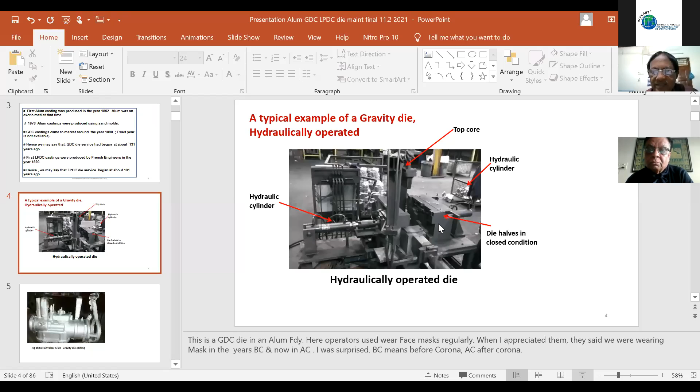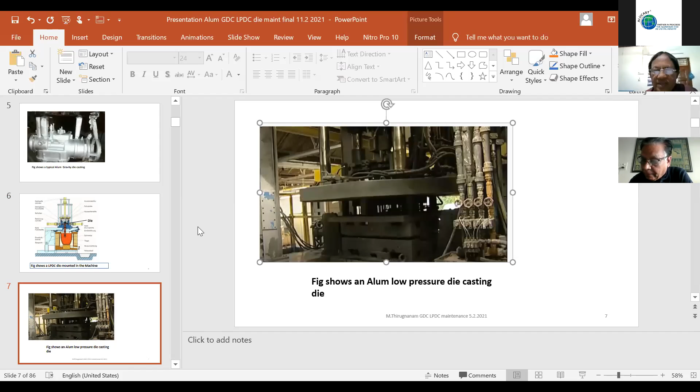Why is there a need for maintenance in GDC and LPDC? Dies are affected by thermal stresses due to heat of the molten metal.

Thermal shock occurs in every pouring because the temperature difference between the metal and the die is about 470 degrees. Metal is at 720 degrees and the die is at 250. The difference in temperature is 470 degrees.

It's like always pouring very hot water on your head and getting a shiver. Like that, for every shot, the die undergoes a thermal shock. Molten aluminum has a natural affinity for iron, and it attacks it chemically also.

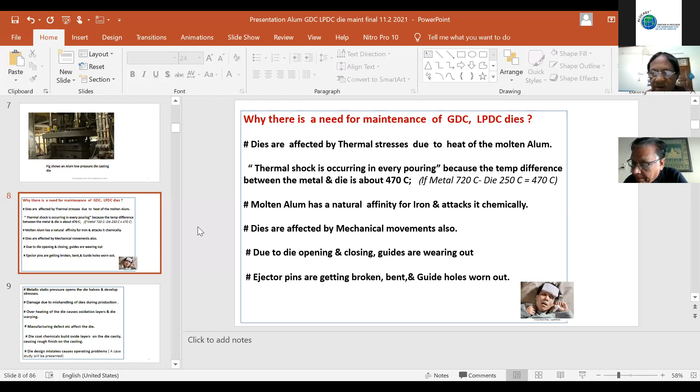The dies are affected by mechanical movements also, due to ejector pins getting broken, bent, guide holes worn out, etc. So the die is affected by so many factors.

Metallostatic pressure opens the die halves and develops stresses. However much you close the die, it opens at the top.

Damage due to mishandling of dies during production also happens. Sometimes the operator uses force for closing.

Overheating of the die causes oxidation layers and die warping. Sometimes when the dies are heated to start the pouring, people put the burner on and go off. The dies will get red hot. Effects like that also affect the die.

Die coat chemicals build oxide layers on the die cavity, causing a rough finish on the casting. Die design mistakes also cause a lot of operating problems.

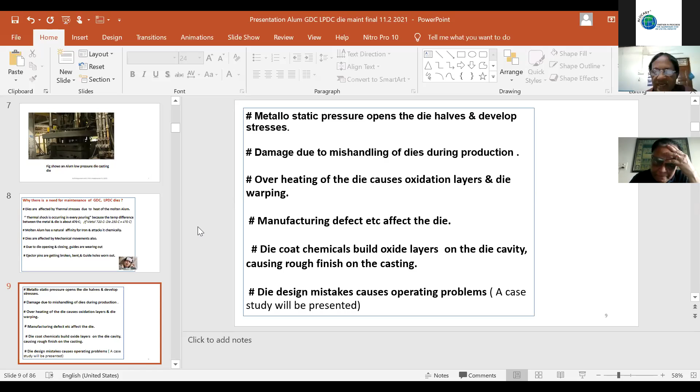Sharp edges left out during die manufacture create hot spots and crack development. All the above create the necessity for die maintenance.

In a nutshell, dies are self-destructing equipment by the very nature of the process itself. Of course, this is true for all foundry equipment like furnaces, building equipment, even ladles - they perish. Sometimes they get worn and leak also.

So there is a saying that a foundry's profit or loss is decided in the tool room indirectly rather than in any other area. Indirectly, die maintenance personnel run the foundry show.

At this point, tool maintenance personnel come into the picture in all stages of production, not only in making castings, but also in fettling, trimming, everywhere.

They design the systems and procedures for maintaining the health of the dies until the designed service life is obtained. They are the right and fittest persons to scrap the die also.

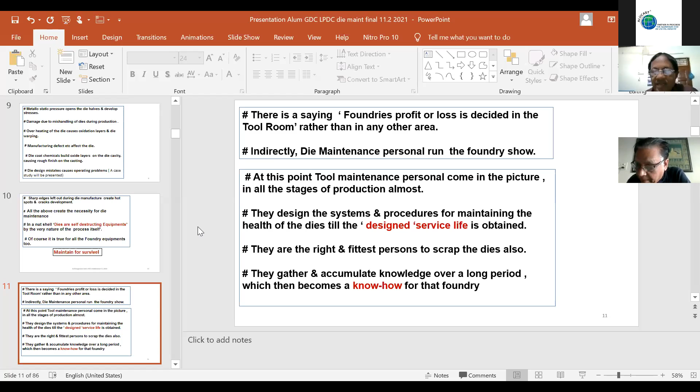They gather and accumulate knowledge over a long period, which then becomes know-how for that foundry. They give feedback for improving the die design and die manufacture.

I shall present a few case studies on this. First, the statistical support and guide for die maintenance is the die history card, which is a very vital record.

As soon as the die is returned, the first activity is to enter the total number of shots taken in the die run, in the die history card. The last shot taken must come along with the die.

The shop supervisor should send his observations on the die, the problems encountered, and the service requirements. Tool service personnel then start their planning.

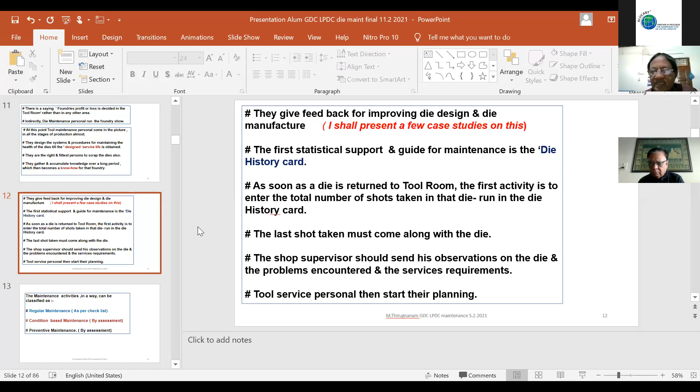The maintenance activities can be classified as regular maintenance, that is the routine work common to almost all the dies. The next is condition-based maintenance, based on how the die looks and how it is affected. And preventive maintenance, to prevent long-term failures during die running.

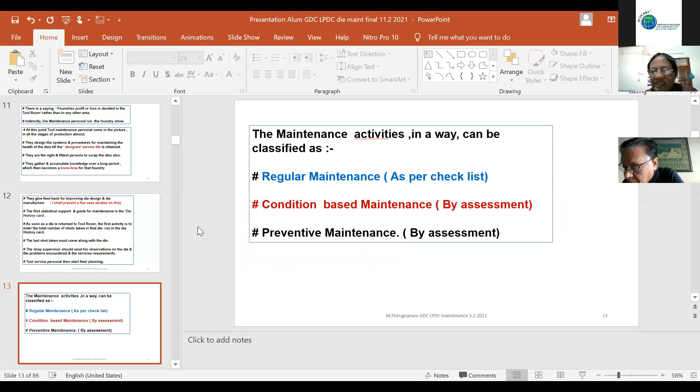First, regular maintenance - it is like taking a bath regularly every day, a routine activity. A checklist is designed by the tool serviceman that will be followed during service. Most activities are common to all the dies except a few differences.

Although GDC is a positive gravity process and LPDC is a negative gravity process, because metal flows against gravity, the maintenance is almost similar, except for a few points of difference.

As soon as plant production is completed - say 5,000, 3,000, or 6,000 numbers - the die is moved. At that time, a die service report is to be prepared by the supervisor and sent along with the die, along with the last full shot of the casting.

Many people forget to write the date on the casting. I would insist that when they send the casting, they must take a marker and sincerely write the name and also the date of the casting.

The following information is to be filled in by the shop supervisor: number of shots taken, casting.

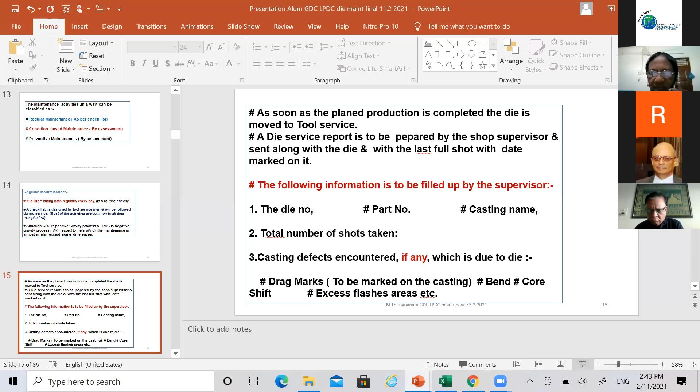The following information is to be filled by the supervisor: the die number, part number, casting name, total number of shots taken, and the casting defects encountered, if any, due to the die. For example, many castings will develop drag marks, depressions, core shift, etc. Excess flash areas are to be marked on the castings.

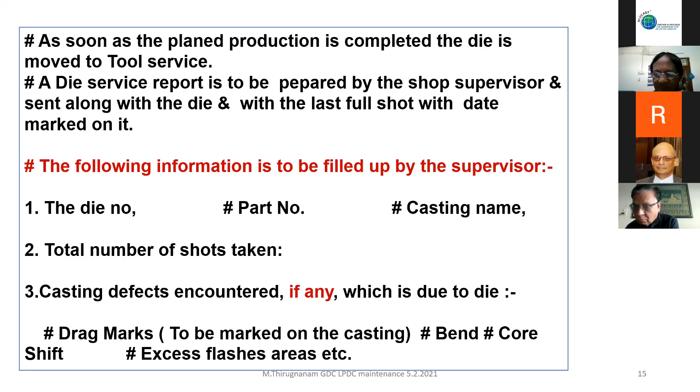Also, various observations should be noted: whether the die closing is correct, the die opening is correct, the bottom board dropping is correct. So many movements are there in a die depending upon the construction. This is very important.

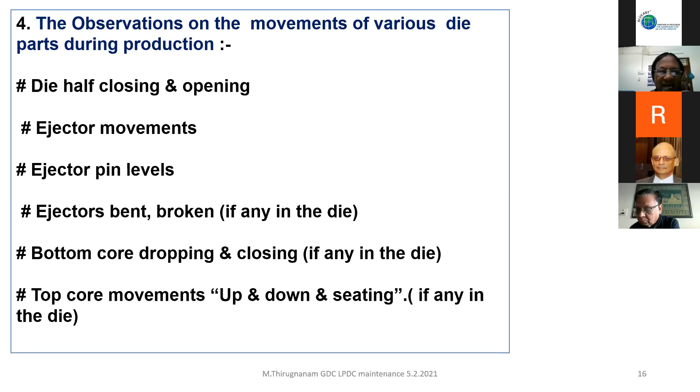Or any oil leak in the hydraulic cylinders, air leak in the air cylinders, metal leak at the parting line. This is one of the very vital pieces of information required because metal leak can cause a lot of accidents. Excess flashes in the die parting line can cause more time in fettling. Also, some dimensional defects can happen.

A tentative time and date for return of the die to the foundry is very important. In India, this is a starting point for many arguments on the shop floor. When a very short time is given for die service, many times the tool room is unable to attend to all the corrections.

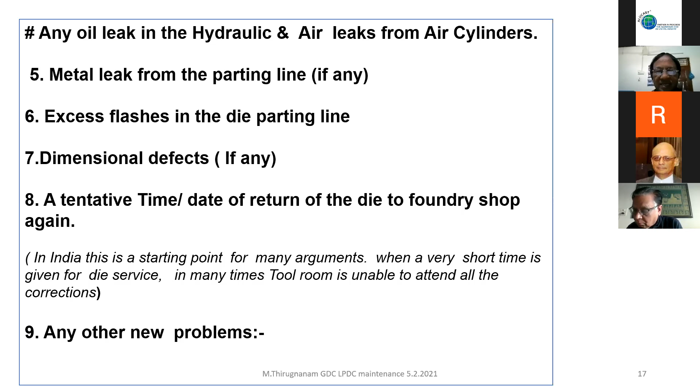Also note any other problems the supervisor observes. As soon as the die enters the tool room, the die has to be cleaned first, then dismantled. Cleaning means all the flashes sticking on the die here and there are to be removed. Then dismantle the die and remove the die coat by applying mild sandblasting, and put the entire die in open condition. If it is a big die, keep it on the floor.

If it is a small die, put it on a die table. Very closely inspect the die cavity area and look for scoring marks, depressions, aluminum welded areas. This is very, very important. Check all the slides and look for metal entry in the slide gauge. Also, you should check the marking screw.

It's very important for traceability. If you are going to service the die in December, anticipate and replace that chip for the next year, and also punch the month code for the current running dies. Check the number of shots taken so far. If it is 10,000 numbers, don't hesitate, don't ask anybody - weld all the die parting lines and clean it.

It will improve the fettling. The flashes will be much less. You don't have to file too much and then run into problems of rough finish and all that. Replace all the small core pins irrespective of their condition.

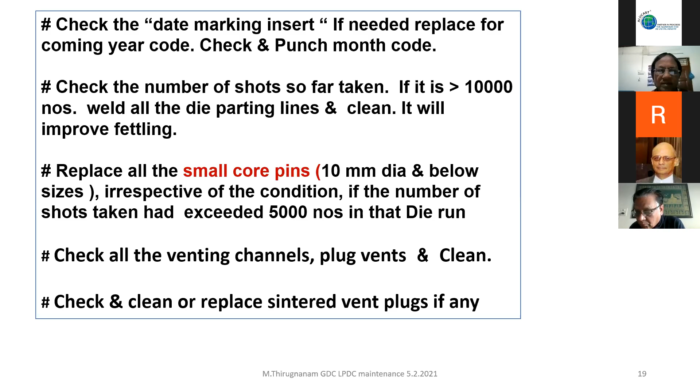Apply blue on the die parting lines and check the blue marking. If needed, match them again. People will ask, why do you want to match a die which is already working well? But it is essential. I am going to present an excellent real life case study - some problem occurred in one foundry. It is going to be an eye-opener.

Check the fin plates, if any - for example, if you are making dies for cylinder heads with a lot of fins. Correct drag marks and depressions, if any, by welding and machining. Check all the ejector pin levels. There is also an interesting case study on this.

A scrap deal of about 5,000 numbers occurred in a die once because the ejector pin level was off by 0.4 to 0.6, causing a lot of unwashed castings. The customer almost shed tears - how can you afford to scrap 5,000 numbers?

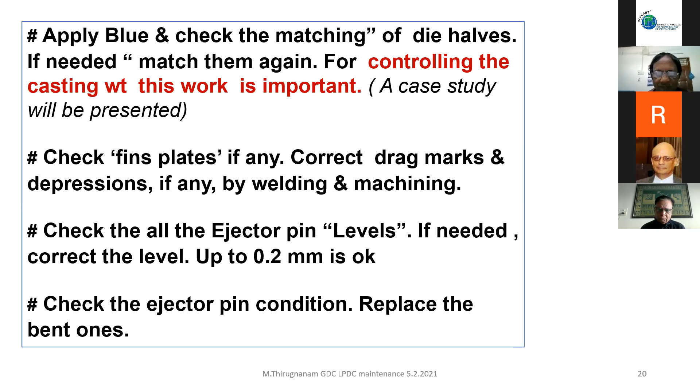Check the condition of the ejector guide bushes and if needed plan for replacements. That will come in the part of the preventive maintenance activity. Probably once in about 50,000 shots, you will have to replace the entire ejector system.

In my experience, I was a tool service man also. Check the condition of the threads and the eye hooks for the die lifting. Sometimes when you lift it for oil leak, change the seals if necessary. But once in about 15,000 castings, I used to change the hydraulic seals without any questions.

Instead of getting it leaking during production, check all the air cylinders. Normally the directional valves only give a lot of problems, be highly noisy also. So check and then replace it, or you can change the O-rings also.

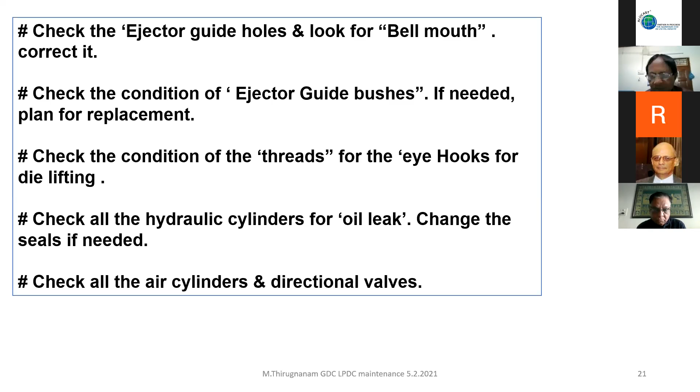Up to about 25,000 to 30,000 shots, it is sufficient to do the regular maintenance alone. After 30,000 shots only, you get into problems.

In the low pressure die casting dies, check the die base warping always on the furnace. It is on the hot bed, so it is likely to warp. Even a very mild warp will leave a gap between the furnace and the die. The metal will not get injected at all with pressure. After all, you are applying a pressure of maximum 0.4 or 0.3 kg per cm square on the furnace. If there is a loss of pressure, metal won't rise. So you must be very careful in that one.

It is likely to warp. But every 30,000 casts, you must take the one and see. You can give a very fine grinding also, say 0.1, 0.2, and see that there's no gap.

For low pressure casting dies, it is better to clean the dies by glass bead sandblasting. Although it is costly, it will not remove material from the die, because if you do regular sandblasting, it will have some problems. In Japan and other places, I have seen every low pressure die is only glass bead sandblasted, very very clean also.

For the normal gravity die, it is sufficient. Once in a way, you can do a mild sandblasting also, or shot peening also, because sometimes it will take on a waxy layer. But it is always better to do it every 1 to 2 weeks, otherwise there will be a lot of die coat build-up and the riser becomes smaller, then there is a lot of problem.

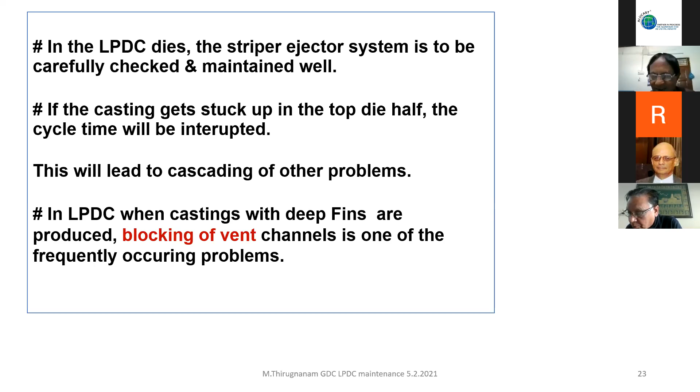Supposing they are using a lot of RC cores, the resin gas and sand cores will deposit burnt resin gases and resin on the vent channels. If this gets blocked, hardly 0.3, 0.4, and if it reduces to 0.1, 0.2, there will be a lot of cold shuts and problems.

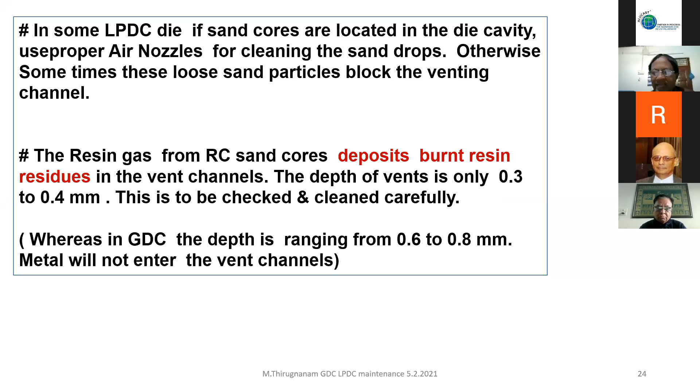So cleaning in the low pressure die casting dies is very important, whereas GDC is not that critical. There 0.6, 0.8 mm vent depth is fine, you can still get away with 0.5, nothing happens.

Sometimes you produce a lot of castings, the fins in the low pressure die, and the gap is very, very important. You can't afford to have many gaps there. If there is a very fine flash entering between the gap of the two fins, it will block the venting, and a lot of problems arise.

Replacement may have to be planned after checking the condition. This comes under CBM maintenance, condition-based maintenance. It is always good to have a setup in place after 50,000 castings; you can always make a new one and put it there. The tool maintenance team should take the decision for replacements.

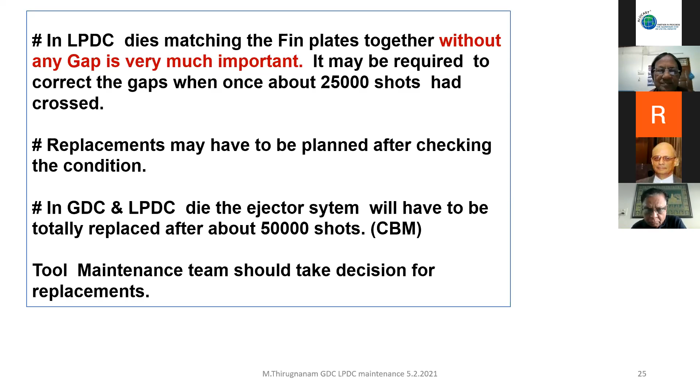Now let us move on to shell core and die cavity. Sometimes you will be locating a lot of shell cores on the die cavity, and the important thing is the shell core can grow. If the shell core die halves are not closing well, all the core print diameters will stay expanded by 0.2, 0.3.

What will happen is it will not sit well on the top core, and when the top die half comes and sits on it, the core can break also. So you must see that the core print area is kept very clean and the dimensions are maintained.

The core breakage cannot be seen during production. It will be known only as a surprise after decoring it. Simultaneously check the core box condition also for that die. This is very, very important.

Sand being an abrasive material, it can wear off very quickly. So reconditioning may be required after about 25 to 30,000 cores.

Especially, there will be fine flashes at the parting line. People used to file that flashes at the parting line. They will become a rough finish in the casting, and the customer will not accept any rough finish on the involute areas of the cover compressor castings. This happened. So you should not file the circumference of any core. In fact, you should not do any rework on the sand core. Otherwise, you will be leaving a lot of problem that comes from the core box. It cannot compromise on it.

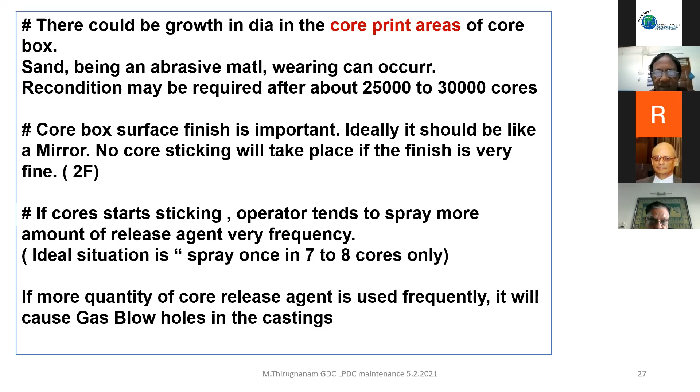When you replace the heaters, people don't have stock. So what will happen is they put some heaters with high power or low power, then it will give problem of underbaking or overbaking, of course. It will give a lot of problems.

So it must be, some people don't have a stock of the correct length, so they will put some excess length, then it will lead to a lot of issues. I have seen accidents happen. Then another important point is the core box closing.

No sand should leak. 1 gram of sand will cost about 20 paise. So if I'm going to lose some kgs of sand, imagine the loss in a year. Also, it can cause the housekeeping to get worse. The supervisor will come and fire on you. So you must see that no sand is leaking, first of all.

It can also cause serious eye injuries, I have seen happen. So the first and foremost thing is, when you go to a core shop, people will tell you don't stand in the parting line because they are not sure whether it will leak or not. That is not the right way. So you must see that the dies are closing very well, check and weld the parting line if necessary to avoid all these things.

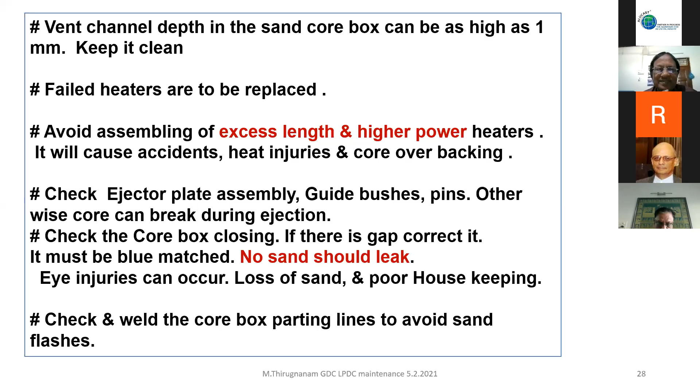Once in about 40,000 castings, the shell core location has got to be checked once again. For example, in the cover compressor castings, it's a very complicated involute profile. Generally, not much variation, 4 to 6 mm will be the wall thickness. And if there's a shift, they will cut at several sections of the cover compressor. If there is going to be a shift of more than 0.2 difference, they won't accept it.

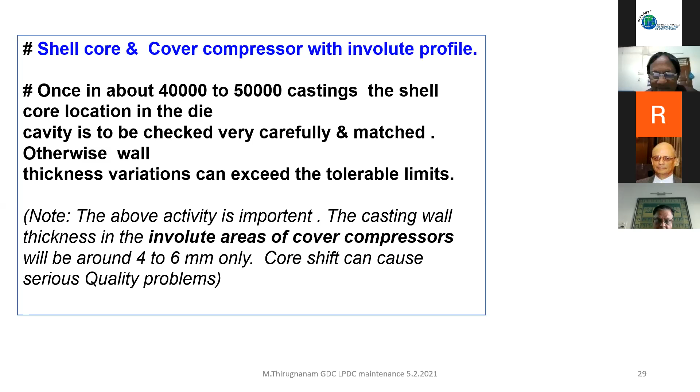Very important. Now let us move on to some interesting topics: the amount of Japanese work practices, regular maintenance in the tool room that is being done, online maintenance support in the foundry shop, which is a peculiar thing to India. I will tell you how they are doing it, and fitness of the toolmaker himself, and training of the toolmaker.

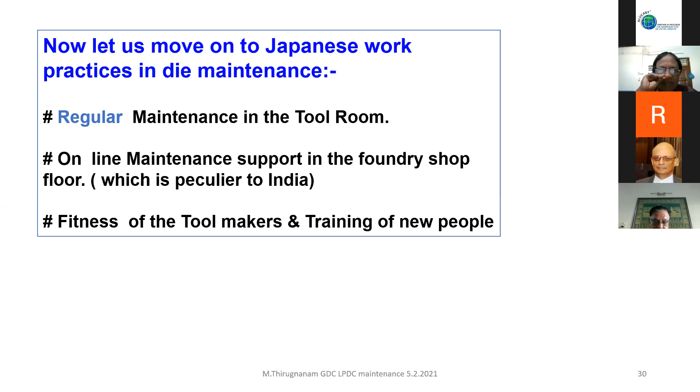Now, the information given here is only based on my personal observations when I was trained in Japan and Korea for a very long time. But I am not trying to generalize this. This is not applicable to all.

There are 2 dies for the same casting. They somehow convince the customer, get money, reduce cost, and make 2 dies for the same casting. One will be in production, the other will be in service, or it will be kept ready after servicing. Therefore, if there are 2 dies, they get sufficient time for a thorough servicing.

Unlike in India, you have only one banyan every day, you have to wash your banyan and wear it. It was such tough stuff. Many times, tool people do not get sufficient time, so they have to only put the tag, dies ready for production.

They produce about 10, 20 castings extra, not more than that. Frequently they withdraw the die and do only routine maintenance, just like taking a bath every day. This is like not wearing a shirt for 5 to 6 days, but washing it on the first or second day with less dirt and less effort. Otherwise we have a problem with our housewives. Owing to this practice, the die condition will not deteriorate fast. Only natural wear takes place due to aging only.

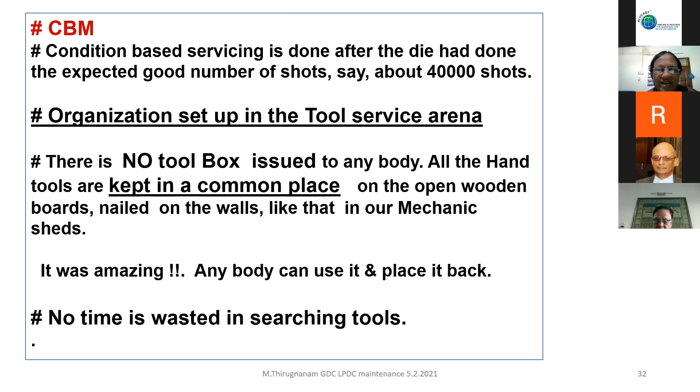Fasteners, nuts and bolts, washers, or any other small items are kept in the open rack. Open means it will not disappear. Anybody can take anything they want and record it, handwritten - sometimes they used to even write with pencil in notebooks. Every day somebody will come and take the list, and then arrange the quantities for replenishment. All that is taking place.

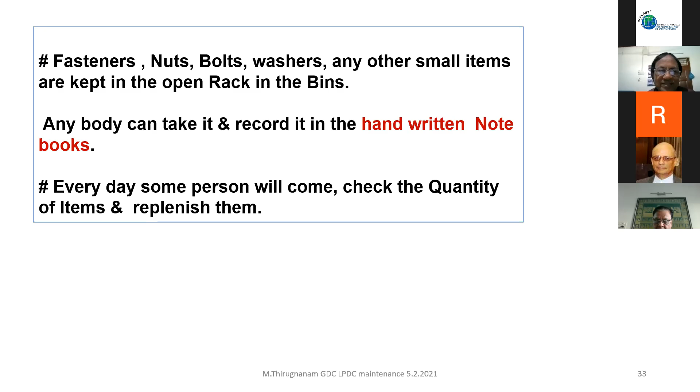Then this is a very important area which is not there in India, to my knowledge. A team is formed which consists of 2 or 3 tool servicemen or toolmakers. They are allotted by management a set of dies, say 10 or 15 dies. They are responsible for the non-stopping running of the dies. Top management will not care about anything. They see that the dies are run and maintained very well. They plan for all the spares and order by themselves directly.

They are given authority for replacing the dies also. Such power is given with a lot of confidence. Online maintenance - this is not there in India as far as I know.

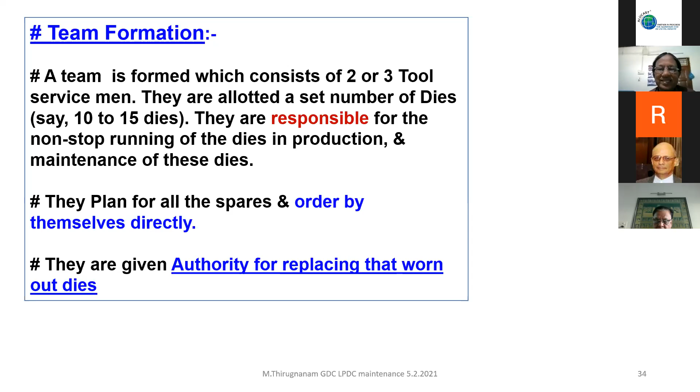In every shift, one of the die makers goes around the shop floor. He walks casually, takes a shot from the machine or checks the casting himself, notes it down, watching where things are going wrong - any flashes, any breakages, all the time. He keeps silence, he will not talk to anybody. He will come, take the casting, note it down, and go. When it is necessary, he gives a standby die. He himself will ask, 'Can I have this die back and give you this die?'

The die setups are done by 2 or 3 people. Within another 15 minutes, the die will be run again. They call it online support service. You don't have to call somebody on the phone or send someone to call a tool service man - that is not running support. There is a live line support which makes the utilization very good. There is no need to send requests or phone calls, unlike in India.

This is very important. This can tell the truth to the quality people. I am going to present a case study - after this you are going to be surprised. The toolmaker has a connection, working along with the shop supervisor and quality persons.

Unlike in India, for these low pressure dies and initial dies, the die coating is done in the tool room by a set of different people. They are not toolmakers, but they are experts in coating. The die coating method is quite different - the coating will last for 1 week, I've seen it myself. Here, you prepare every shift, and you're losing so much time. Their way of coating is different - they have an oven, they heat the die, but they will not heat it more than 150 to 200 degrees centigrade. They will not.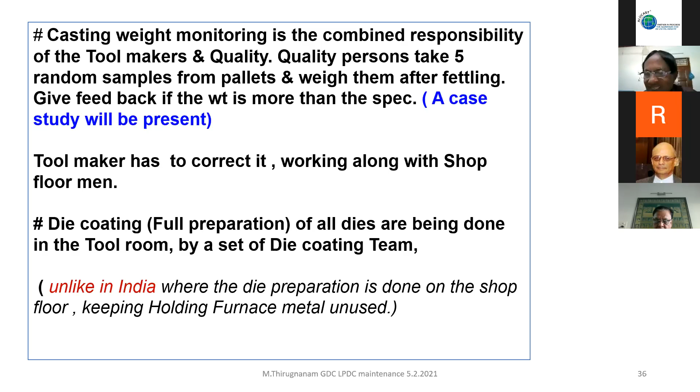Most die casting production was fully automated in many foundries, and carousels consisting of 4 or 6 stations are quite common in Japan. Breakdowns were attended to immediately. Even a set of 3, 4, or 5 members will come and ensure the die is attended to very well, or replace it with an already serviced die which is readily available.

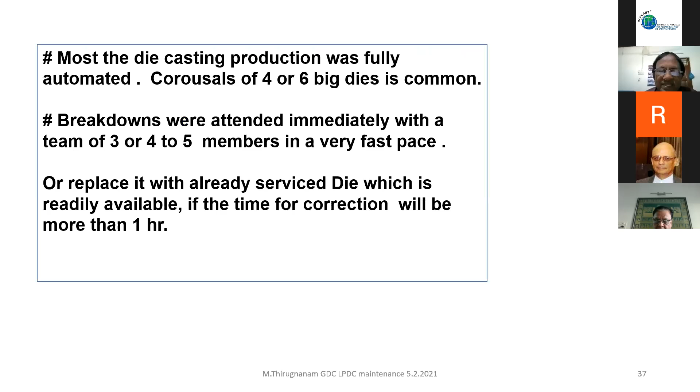If the time going to correction is going to be more than 1 hour, don't wait to correct it.

This is the tool room setup. It is really good. The die will come here, and the die opening is there. Welding and arc welding is in the setup. Here is arc welding, here is welding, here is one normal work station. So many things will be there.

And here you have the tools ready, so people can pick up the tools, open the die, and move it. All the area is so neatly done. Then you have a small surface grinder and lathe and all here. There is one place with a rubber mat and a crane, where you can do die opening and closing. The service dies will be here, and if you want one, you take it. But the tool room will be very, very clean and very neat also.

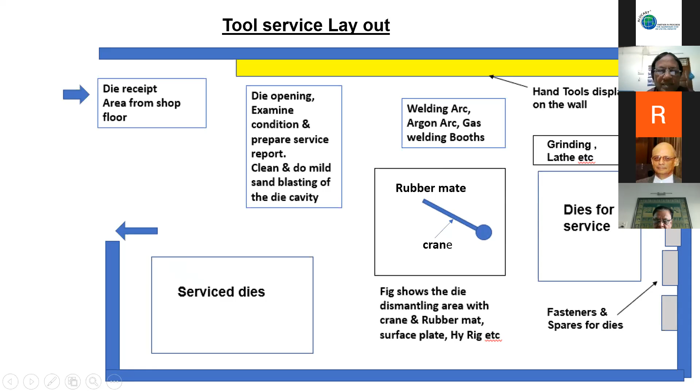The tool display is a rich feast for the sharp eyes of any tool maker. Perhaps this may be his dream, I would say. It was an amazing experience for me to be with the tool room for a very long time.

All tool makers, old tool makers and tool service persons should undergo a mandatory eye checkup, and also they have to qualify themselves to work in the coming years. It's very important that all the tool makers and tool service persons undergo a kind of psychiatric test for mental fitness. I don't know the details, but they told me they have to undergo this test to check whether they are mentally fit to work here. Such things are going on in Japan.

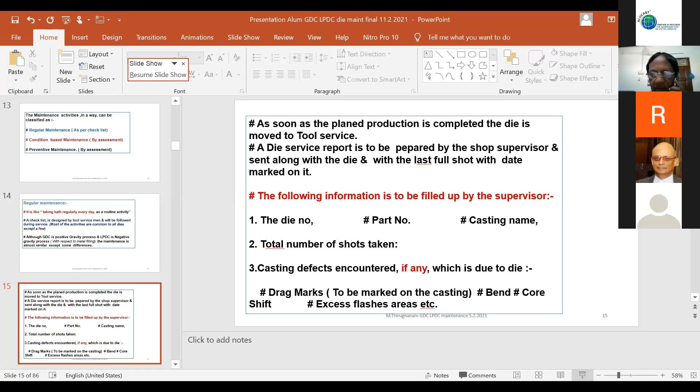Are you able to see? Yeah, that's okay. Are you able to see that? Hello? Now, yeah, it's okay, sorry. Are you able to see me? Yeah, the casting, yeah. Shall I go ahead? Okay.

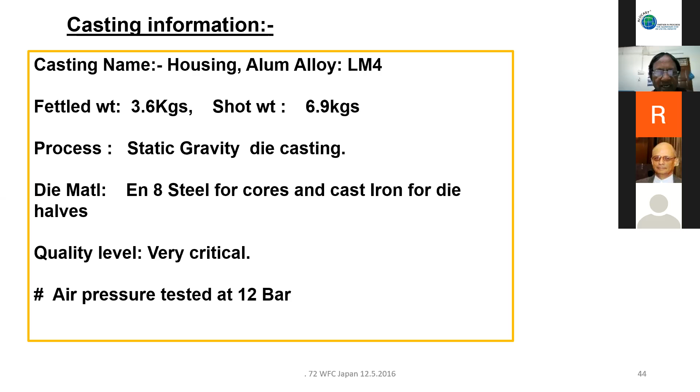The casting name is aluminum. Hello? Okay. It's a GDC die, of course. The die material is EN8 steel for cores, and cast iron for the die halves. The quality level is very, very critical. Let us see what happens.

You find a lot of air leakages in this area of the casting, and this is the problem faced.

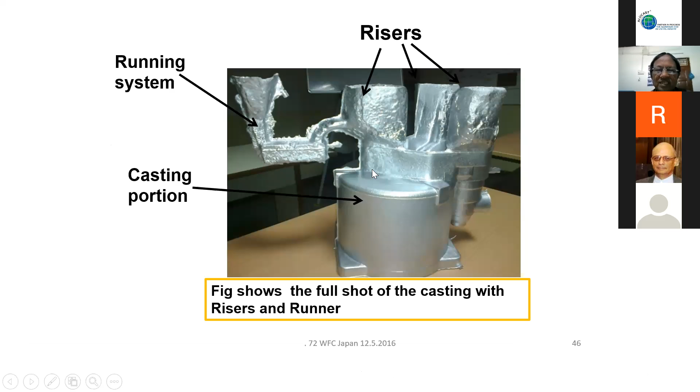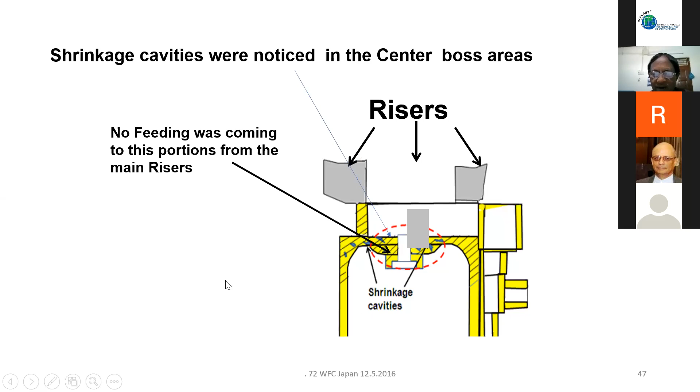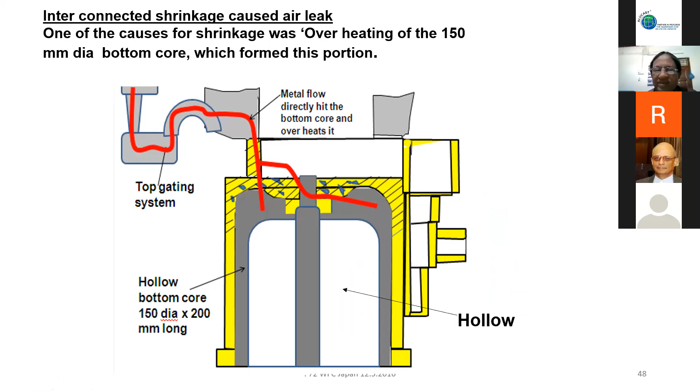Now the problem is, one of the causes for the shrinkage was overheating. There are so many causes, maybe lack of feeding, this and that. One cause we noticed is this goes beyond 400 degrees centigrade. So what we planned is to use some copper chills and cool the chills by air jet. It's a hollow core made of cast iron. We tried to cool it with air, and we found the shrinkage was solved. But it has got so many side effects.

Due to the discharge of air, the shop is getting noisy. Nobody likes it - the whole shop is fully noisy. Also, the compressor is getting overloaded, and the maintenance people asked us to give one more compressor. But the problem is solved - you can't afford to buy a compressor worth about 10 lakhs. Workers also feel uncomfortable. So we had to find a different solution.

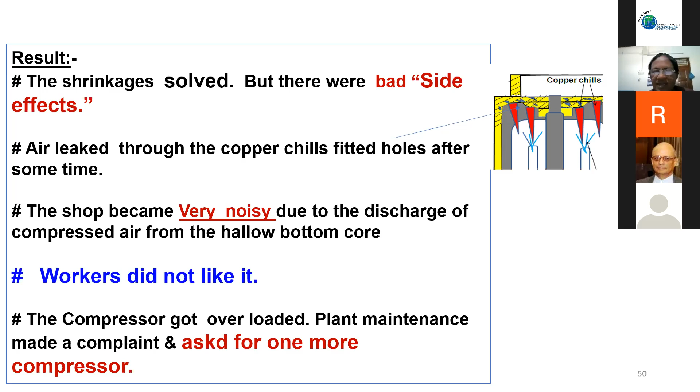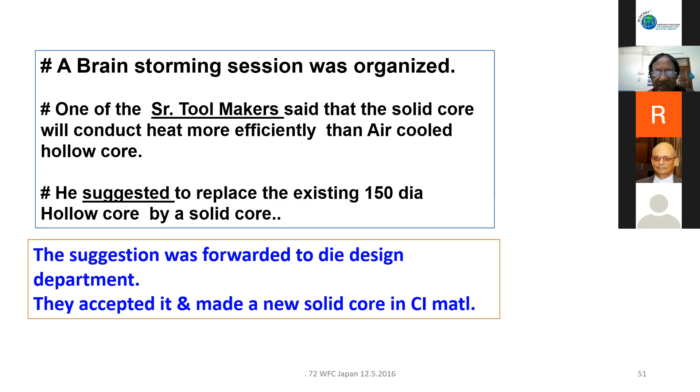A brainstorming session was carried out. One of the toolmakers said a solid core will conduct much better than the air-cooled one. Well, of course, air is a bad conductor. Why don't you try that? The suggestion was forwarded to the die design department. They accepted, and made a new solid core out of cast iron.

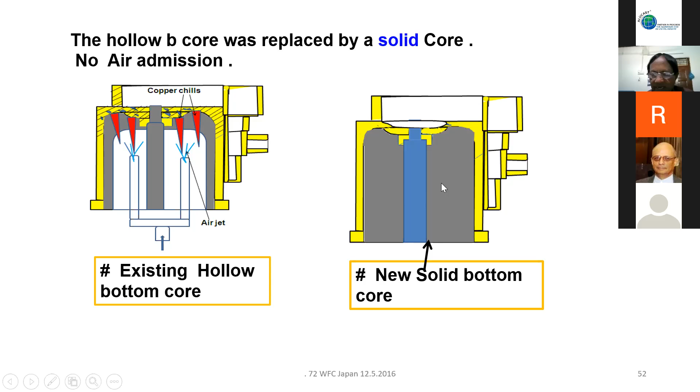This is the hollow core, and this is the solid core - the new one. We tried this core and found no shrinkage at all, because the heat conduction was very fine - no air, no sound. This was an excellent idea from a toolmaker. It goes from bottom to top, and his idea was well taken by the die design people.

On this same die, we got another major problem. The die was not running smoothly. The 150 dia big core, 175 mm tall, was getting jammed. It is not getting dropped easily due to aluminum metal entry into the core guide bore. Breakdowns were many - once a day, everything would stop.

Servicing is also very difficult - such a big core in hot condition, how to get it down and put it back. Then we tried to make the clearance only 0.2 per side. But the core jammed due to the thermal expansion of the core shank. Again, the problem - there was no metal entry, but it jams for a different reason.

First it was jamming by metal entry, second by lack of clearance - totally different problems. Then if the clearance is kept at 0.4, within about a day metal enters. So how to solve the problem?

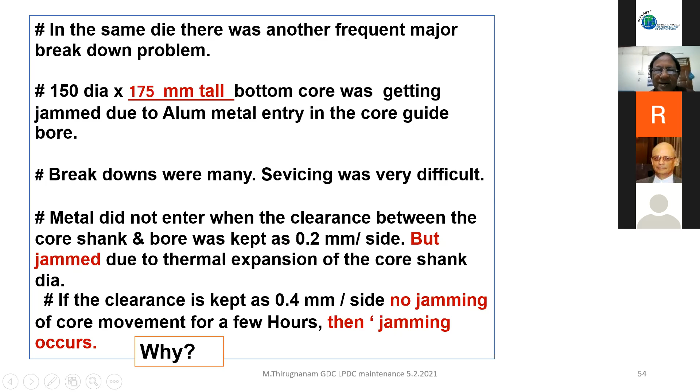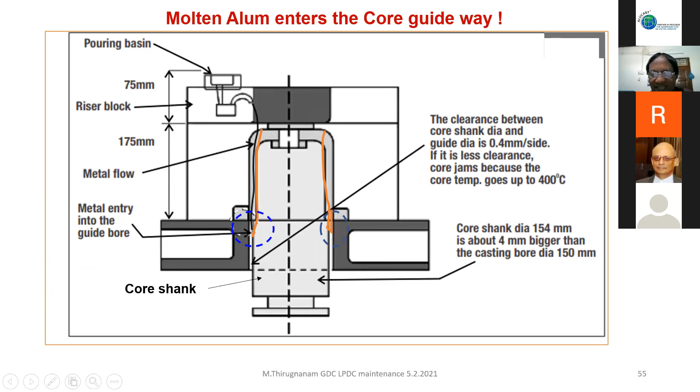See, this is the one I want to show you. Metal enters here and comes straight down into the one when the gap is 0.4, and the core jams in a day. Again we had - see this one, I'll show you - when the metal comes from there, it goes and the core guide bore is just right below the metal end. So this 175 plus 75, 250 mm of metal is coming down. It gains a velocity of more than about 2 meters per second. That velocity goes and jams the core.

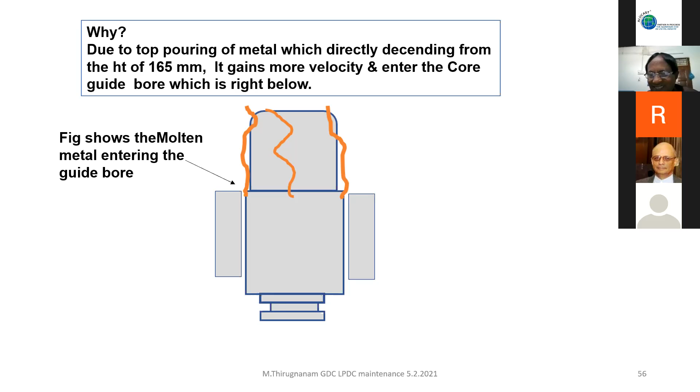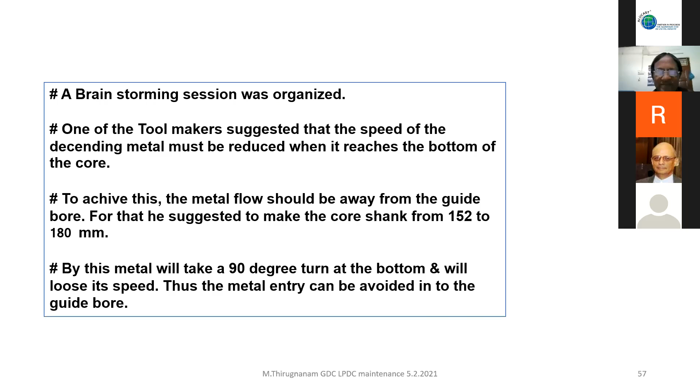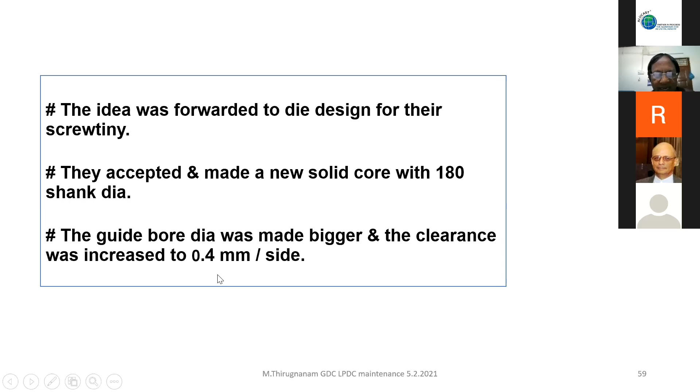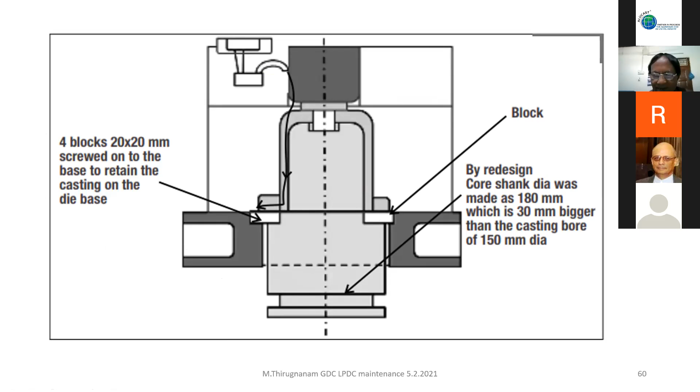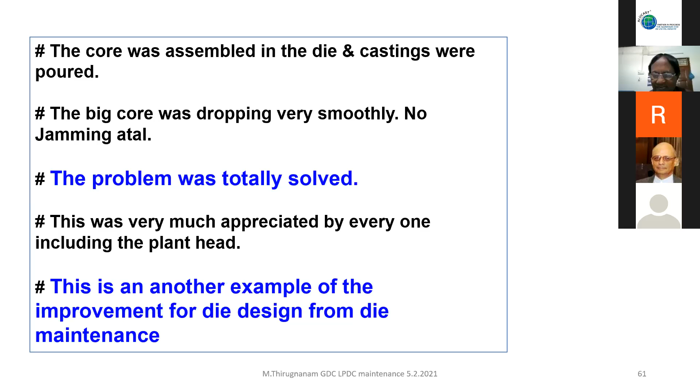Everything was smooth. Even the die ran for 1 week, nothing happened. It runs very smoothly, no noise. This contribution again is an example of how improvements go from the bottom to the top. This came from a toolmaker, and it went very well - an excellent contribution from the die maintenance people.

This is another case study: the flutter effect. Flutter effect is a very rare defect, less known to many people, because of a lot of similarities with the flutter effect holes and gas holes. Both are circular, but gas holes are different. Air blow holes are also similar. The difference between an air blow hole and a flutter hole is only in one area - an air blow hole at the bottom will have a grayish surface due to oxidation, but flutter effect holes are very clean, neat, shiny surfaces. That's the only way to tell them apart. Many people won't be able to differentiate between a flutter effect hole and a gas hole.

So this is the given input, very important. There is one casting, a very critical casting. In this bore only, we are getting at this point a kind of shiny flutter hole. Thinking this is due to air blow holes.

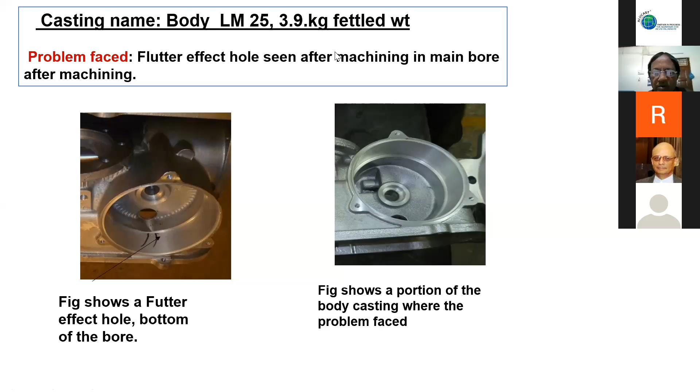And sometimes when there is no die coat, you are having aluminum welded on the core, and this aluminum will not allow the die coat material to stick on it. So in our context now, we dismantled the core which is causing problems, a 100 mm core from the running die, and checked. We had a terrible scene. See the metal, as aluminum has already soldered like this one, and this is not allowing the coating to go there. Okay, how does it happen?

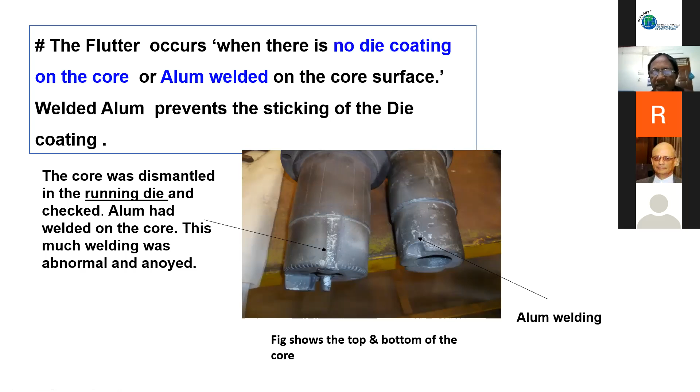Actually, in any GDC die, you will have to coat the cores very well, once in about half an hour to 1 hour, and you will be able to get a good core. If you don't touch up the core, the coating wears off slowly, and finally you will end up with aluminum building on it. Either you spray correct die coating or replace that big core.

Probably during the lunch intervals, you want to dismantle that core and put in a new one. And then I told them, let us go and see what the problem is. The operators were seriously running the die for hours together, producing castings, and we found a lot of score marks in the bore. Then we suspected there would be something wrong with the core. Dismantle the core assembly.

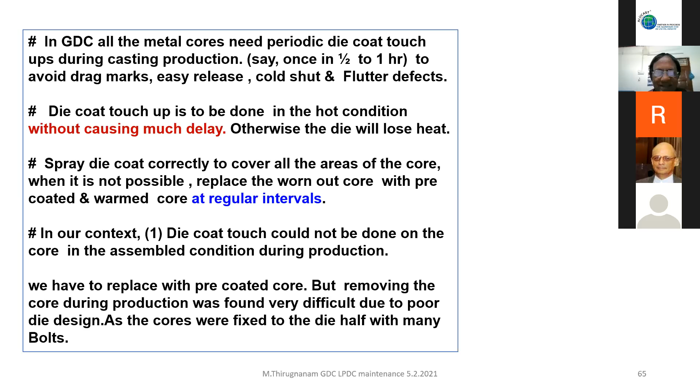See the condition, just because we are not able to remove the core, the operator just places it on top, and the bottom has got no coating. Oh, this is the culprit. Then we said, why don't we make the core removable? Then we came up with an idea.

Again we had a brainstorming session, and one of them said you must make the core easily removable. So we made a new core with a tongue system, so the core can be removed by using the tongue system - just like that we can remove the core and change it with a new core. It's a very simple idea.

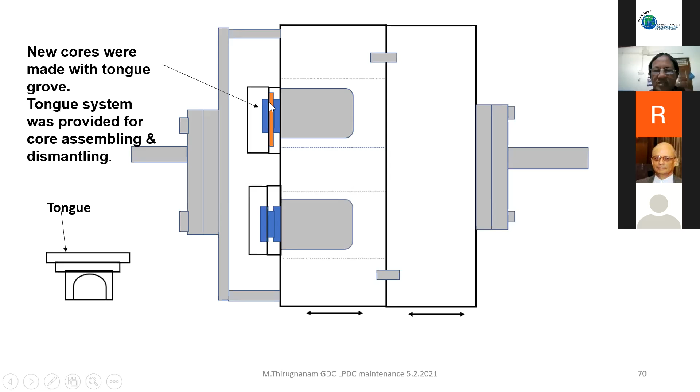There is no more bolting here and there, it's moved by an aero cylinder. Independent of that, we make a core and then put it in and remove it. We found it took hardly about 5 minutes to change the core, just remove the old one and replace it with a newly die-coated and warmed core.

During lunch hours or during tea times, we change it. There is no more flutter effect. All the cases were extremely good and nothing happened. This is one more example of feedback to the die design from the bottom to top, from a tool maker. See how it goes.

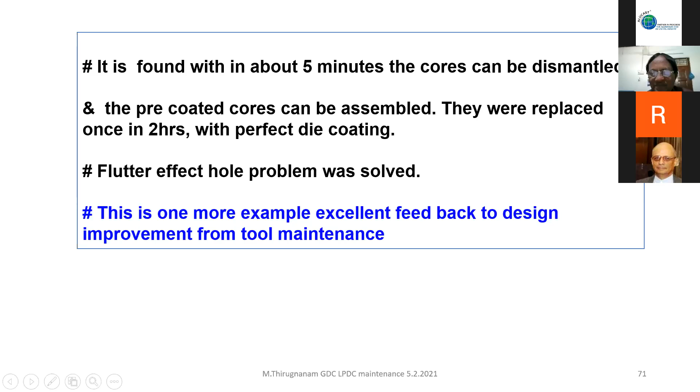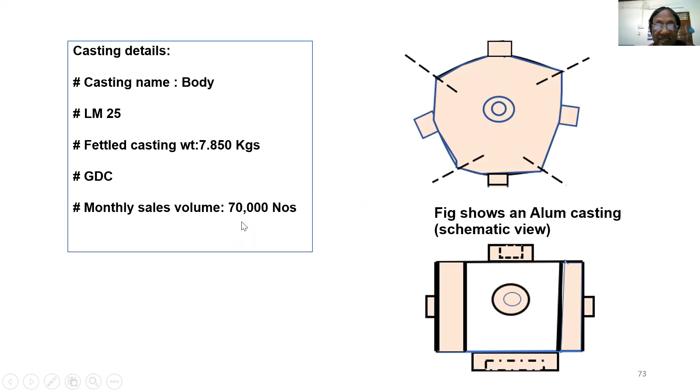This is another one, a pathetic real-time story on weight monitoring. This is a casting which weighs about 7.85 kilograms, out of LM25 alloy, a gravity one. Monthly sales volume is 70,000. It's one particular casting alone, the only one being produced by the foundry.

They have 3 dies. This is the die construction. You see, this is one slide, this is another slide. There are 4 slides coming up because of the parting line. You have to move this cover and this one out and take out that core. This is only a kind of schematic diagram. The profile is so odd, we allow it to go only this way.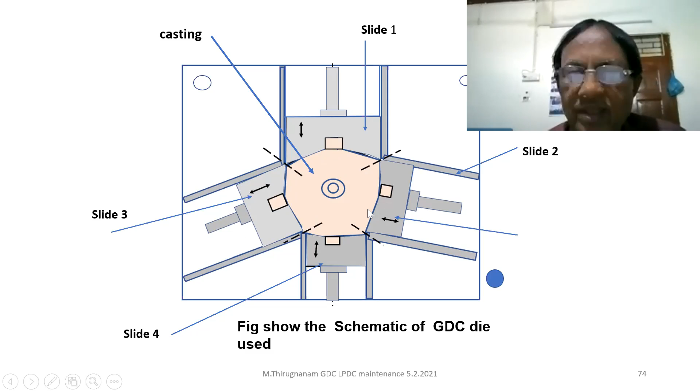And there were 3 dies in the setup - 1, 2, 3 dies. This is a holding furnace, 500 kilogram capacity. Take metal and pour, take metal and pour.

I was walking on this foundry shop. I went for some other problem, and then they asked me to have a look at it. I found lots of flashes on all these castings. There are 4 parting lines - 1, 2, 3, 4 - and I could see plenty of flashes. For this problem I was not called, I was called only for some other problem, but I could notice there is a problem here.

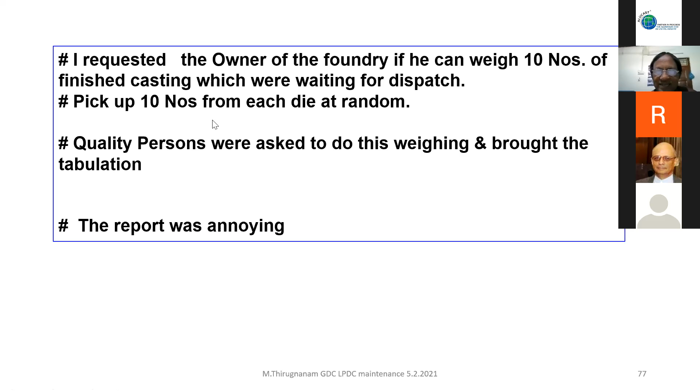Then I asked the owner to weigh about 10 numbers from each die and pick up castings at random from the pallets waiting for dispatch. He asked the quality person to weigh them and make a tabulation. You see this one - this is the first die, the second die, and the third die, common across 1, 2, 3, 4 up to 10.

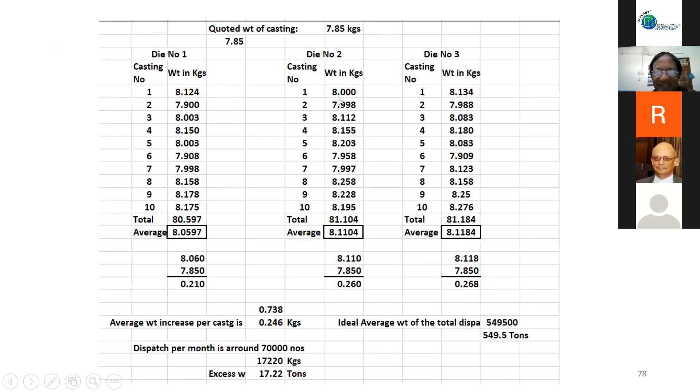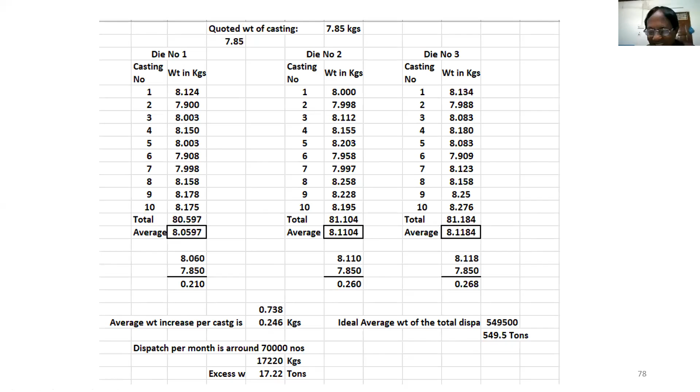549 tons exactly, but you are 17 tons up. In front of your very eyes, you are sending fat castings. The owner was highly upset. I told him your foundry was losing about 17.2 tons of castings - you are spending more weight on castings than you should.

Normally 1% variation is acceptable in any casting. The Japanese are still at 0.5% - they are working on that. 78 grams per casting is okay for you; if it's plus or minus 78, that's fine. But by how many grams are you up?

This is a very big issue because this happened since they had only 3 dies allotted, and there was no time for servicing at all. He is running all 24 days. Since he doesn't have a 4th die to replace and service the die, he runs all the days in a month, and that leads to a big loss.

So my recommendation was to immediately stop this die for a week, or go for a 4th die for servicing. He ordered it immediately - a 4th die - and in about 2-3 weeks he gradually repaired the parting line and ensured the die course was corrected and blue matching was done. He was able to save that 15 lakhs per month. Now things are okay and the problem is solved, but he paid a big price for it.

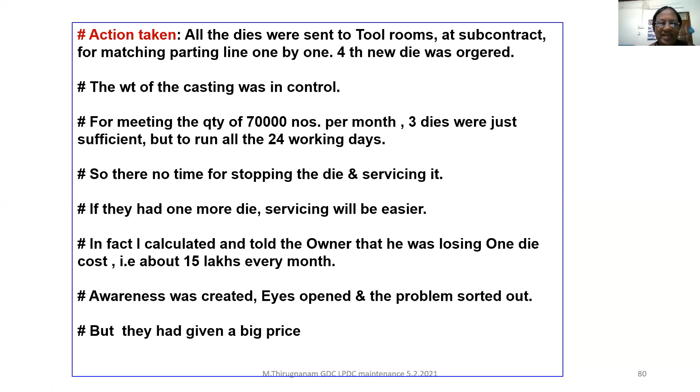Because of tool maintenance - since he doesn't have his own tool room, he sends the dies outside to get repaired. This affects die service life and customers. So when do you want to give garland to your die? Very important question.

The gravity die, if well maintained, can go without any weight increase for 80,000 to 1 lakh shots. I have even seen dies running after 1,50,000 shots. For low pressure dies, normally 60,000 to 80,000 shots if well maintained. Some customers replace the dies themselves.

I was supplying some castings to Mico. They fix the die life at 1 lakh for a zinc die casting. Even if the die is in good condition, Mico will not take even one casting after 1 lakh shots. They specify the die is running about 60,000 - you make a new die and supply it. So some customers are well defined and we have no problem with that.

Some customers do not pay the die cost - they say it's your property, you supply it, and they pay 5% more than the normal cost. So it's the property of the supplier, not the customer - that's how it goes.

In that case, the supplier will try to maintain the die in good condition because it's his property. Some customers pay for the die and demand more numbers of good castings from a withered, worn out die, and the cost of die maintenance goes up. So it's always a kind of dialogue between us on when to replace a die.

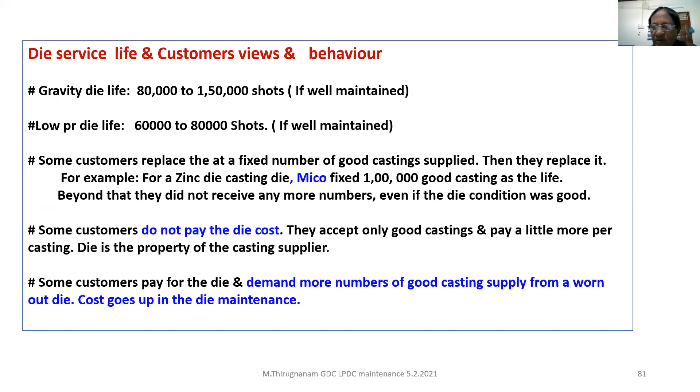A word about die failures. Die failures and forensic engineering are very much a thing abroad, also in the USA. If the die cracks and fails within about 500 to 1,000 shots, it is due to a manufacturing defect - no doubt about it. If a die fails at 30,000 to 40,000 shots, it's due to abuse, mishandling, and poor maintenance. If the die fails at 80,000 to 1 lakh shots, it's due to aging.

So don't try to put in more effort and run dies that are overweight - the casting weight matters. There is a science called forensic engineering; experts and firms are available in some countries. If a die fails at 500 shots, there are certainly disputes to be resolved.

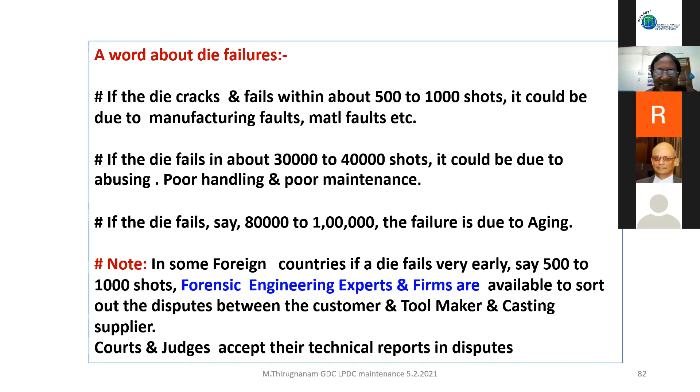In USA, they file cases and they want to know whether it is really due to die mistakes or something else. It is applied to many things, not only dies, castings, or any product. If it fails earlier, they will go to court. So there is a separate branch for this, a different thing. A lot of people are there, and the courts and judges will accept the report of the forensic engineers. It's happening, but in India that is not there. If it fails, it's your funeral.

It's finished. When to scrap the die? Normally, the dies are scrapped when it is not operable, or when the product becomes obsolete, or when the dimensions are so critical that it's not possible to maintain them. In some castings it happens also. Mutual negotiation between customer and supplier is the final thing. They decide when to scrap the die.

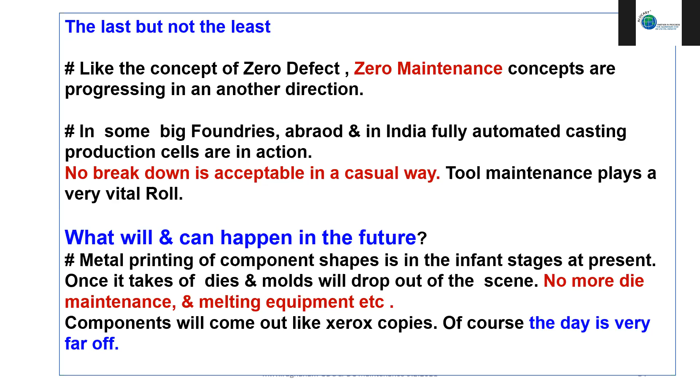Anyway, last but not the least, the concept of zero defect, zero maintenance is progressing in Japan, where the die has no maintenance at all. That is difficult. In some big foundries abroad, and in India too, fully automated production cells are there, so no die breakdown is acceptable in a casual way. Tool maintenance plays a very, very vital role.

Okay, what will happen in the future? Metal printing of component shapes is in the infant stage now. Once it takes off, dies and molds will drop out of the scene. No more dies, so no more maintenance and melting equipment, no more die maintenance meetings. Of course, components will come out like Xerox copies. Of course, that day is very, very far off.

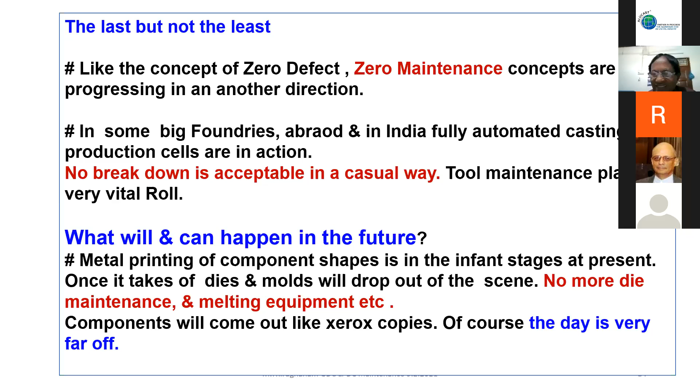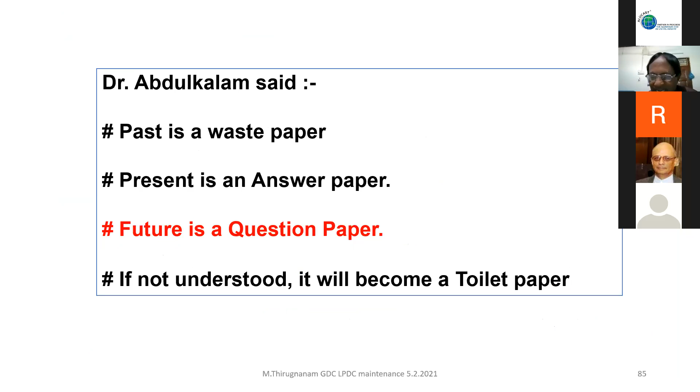Once Abdul Kalam said, past is a waste paper, present is an answer paper, and the future is a question paper. If not understood, it will become a toilet paper. That's what he was telling. We must understand the meaning of it. If we don't update ourselves, we will drop out. We have to run fast to stay where we are. Thanks to everybody, Namaste.